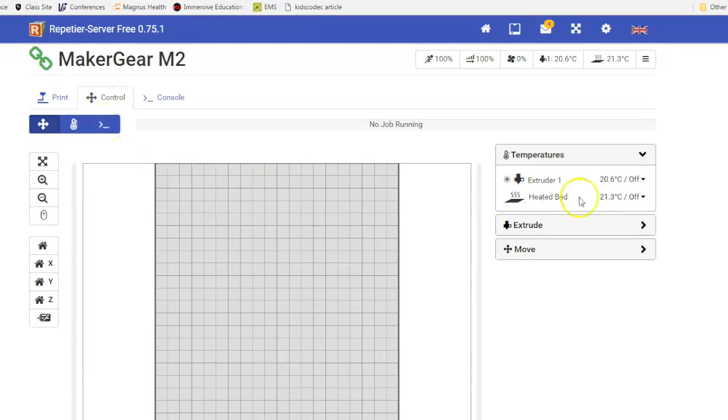So under the Control tab, I'm going to go over to the Extruder 1 and turn it on to PLA 210. And the heated bed, I'm going to turn on to PLA. So those will start heating up while I'm preparing the file to be printed.

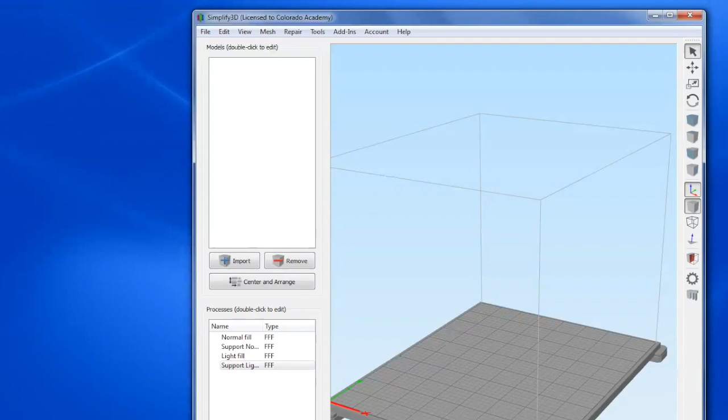I'm going to use the Simplify 3D program to make the STL file into information the printer can actually understand. So, your teacher will have already downloaded your part onto the desktop of this computer. You have to use the computer that is connected to the other 3D printer because it's the only computer with the Simplify 3D software on it.

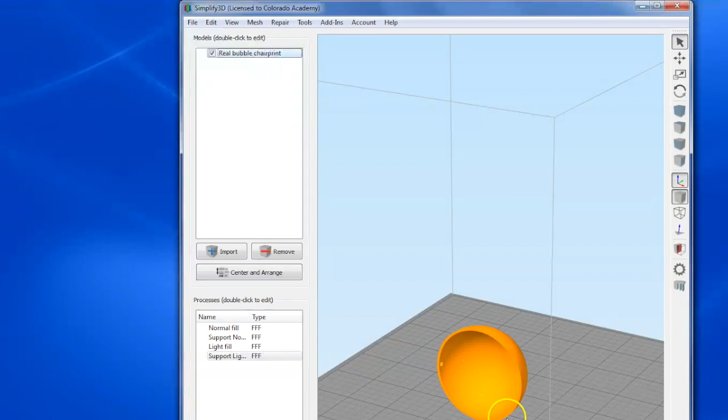So, once we have the program open, I'm going to click on Import, and I'm going to choose the model that I want. If the model comes in at an angle that is not very good, you can change it. So on this one, if we printed it like this, it would need support material, and it's just not very efficient. So I'm going to click on the Edit menu and choose Place Surface on Bed.

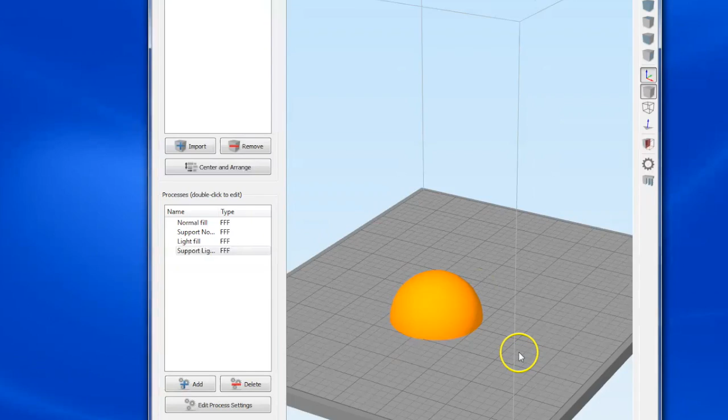I'm going to zoom in by pushing on the scroll wheel and select a flat edge. So this edge right there will then be on the surface of the bed, which then rotated the entire piece. So that's good. Now with this piece, I'm actually going to need support material. So over here under Processes, I'm going to choose Support Light Fill.

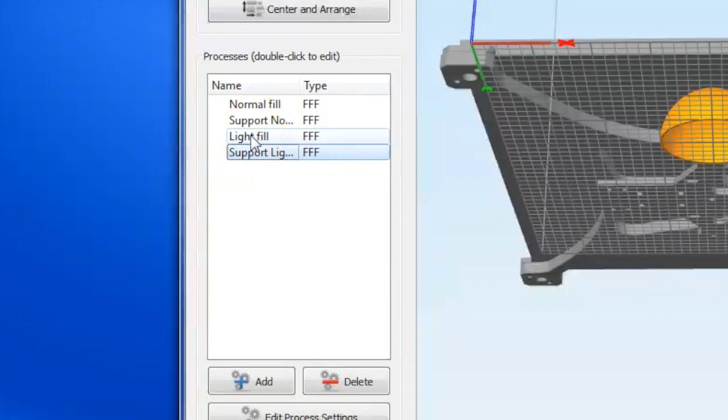If you do not need support material, so you don't have any parts that are overhanging or angles that are very acute that need support, use the light fill option. If your object needs to have a lot of strength, use normal fill. So now I'm going to click on Prepare to Print. I make sure that the process selection I want is chosen, Support Light Fill, and then I click OK.

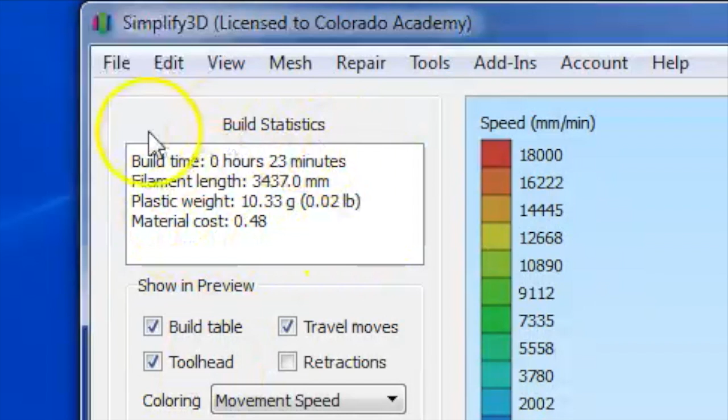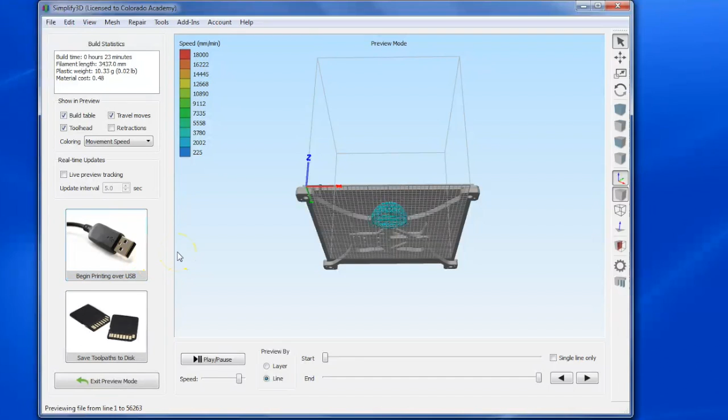It shows me a preview, and it shows me my build statistics. So for example, this part will take 23 minutes and use approximately 10 grams of material at a cost of 48 cents. Now, if I were printing directly to the printer connected to this desktop, I would click Begin Printing over USB. Because we're printing to the networked device, we're going to save toolpath to disk.

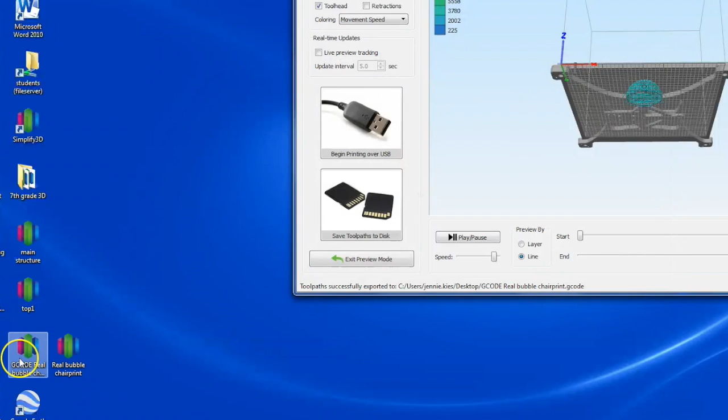Now, if I save this as Real Bubble Chair Print again, I will have two copies of the same file on my computer and it would be difficult to know which one is the correct one for the printer. So I'm going to change the name by adding G-code at the front so that I know that this is the file that the network printer needs to be able to print the part. So I click Save, and then it saves on my desktop as well, right next to the original.

And now I can go back to the interface and click on the Print tab and click on Upload G-code. See, these look exactly the same, but this is the one that actually works because this is the one that has the word G-code in it. So I click Open. It tells me it's uploading, so I wait.

Okay, right now the nozzle is at the correct temperature, 210 degrees, but the bed is not quite up to 60. So it'll still take a little while to start, but I can click on the Start Printing icon, and when the bed has reached the appropriate temperature, it will begin printing. It takes a little longer for the networked printer to begin printing than the printer connected by USB because it takes a little time for the information to be received by the wireless.

I click on the print icon and then I wait. It gives me an estimated time and it will begin printing when the bed is fully heated. If you have any problems during the print, make sure you click stop as quickly as possible.